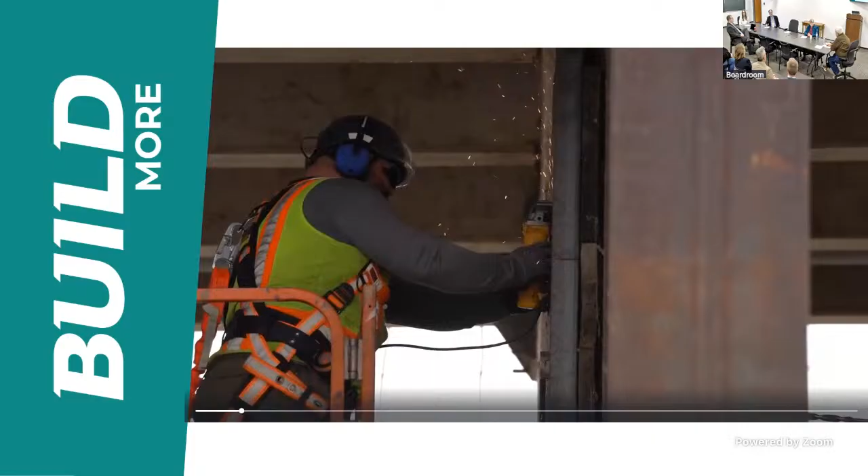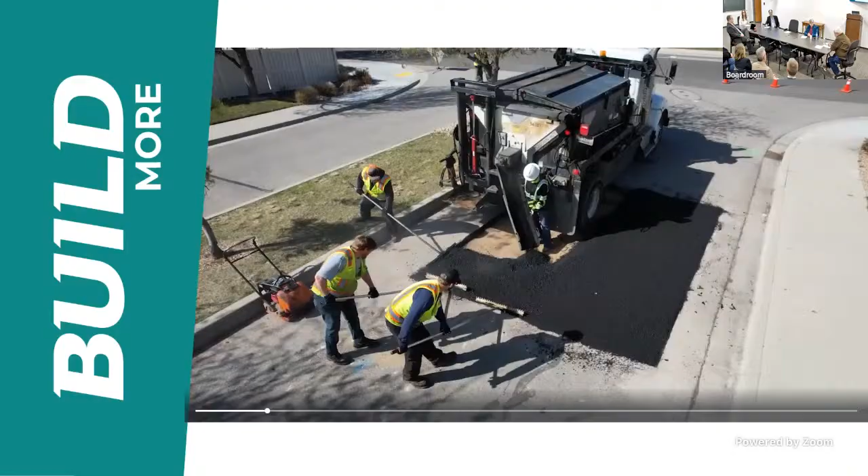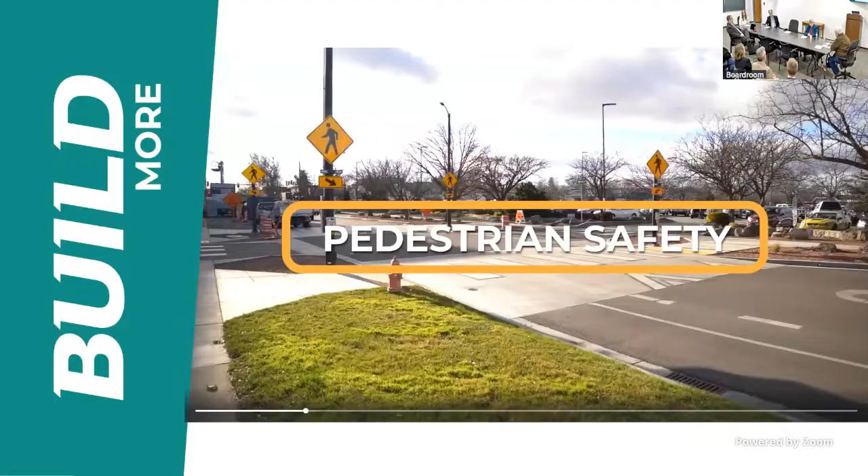ACHD advanced critical transportation projects that will serve Ada County for years to come. 13 project designs were completed, setting the stage for future construction and long-term improvements. Notable construction projects included Eagle and State Street, State and Pierce Park, Eagle Lake Hazel to Amity, Ustick Black Cat to 10 Mile, the award-winning Eckert Bridge repair, Phase 1 of Linder and Overland, multiple pavement preservation projects, pedestrian safety improvements including RRFBs and PHBs, and 18 drainage projects. Together, these investments added connectivity, resilience, and safety across the network.

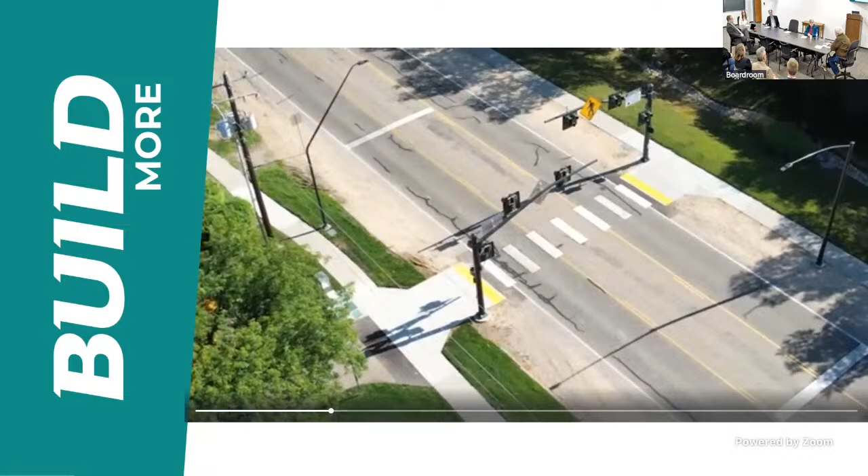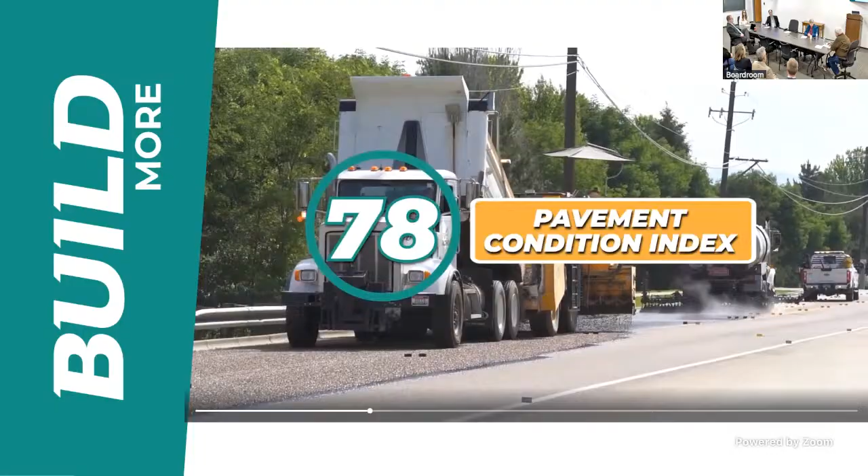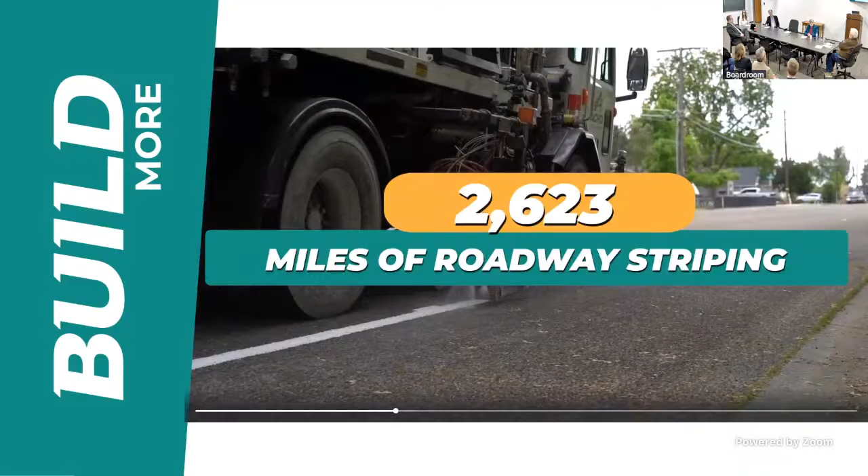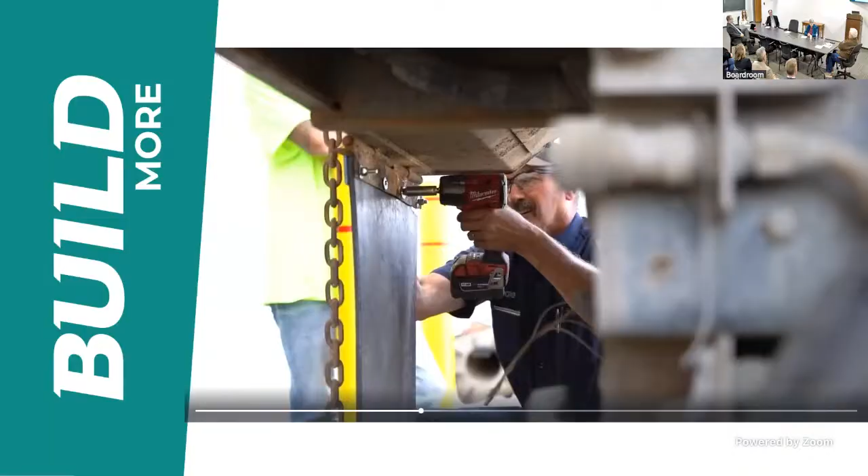Keeping our road system running smoothly remained a top priority. Operations crews chip-sealed over 300 lane miles, helping raise ACHD's pavement condition index to 78, outperforming many agencies across the Northwest. Crews filled a record-breaking over 13,000 potholes, painted or refreshed more than 2,600 miles of roadway striping, and installed over 7,000 new signs to support clear and confident travel. Through coordinated maintenance, efficient fleet management, and integrated deployment, ACHD's operations save taxpayers up to $25 million annually.

To support this work, ACHD added 15 new vehicles to the fleet, helping crews cover more ground and get more done every day. ACHD completed construction of a state-of-the-art traffic operations center, supporting real-time monitoring and smarter roadway management.

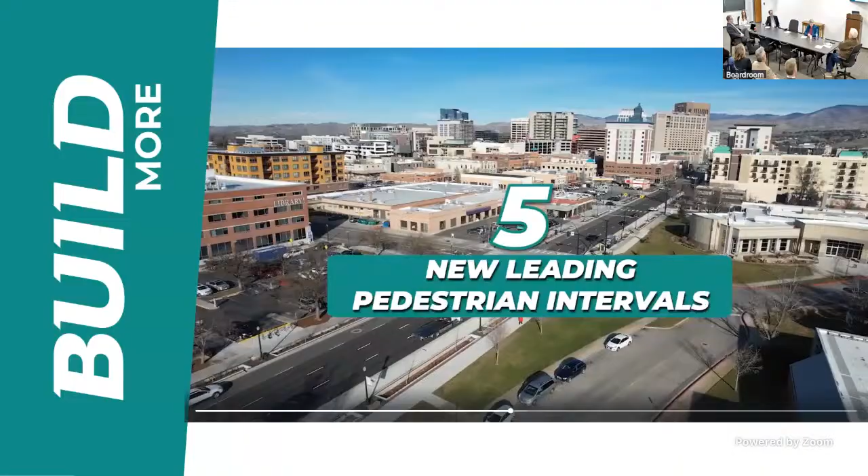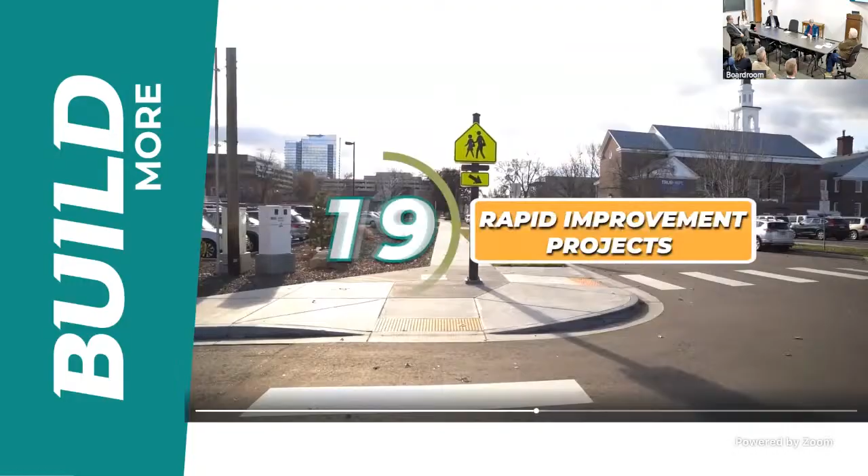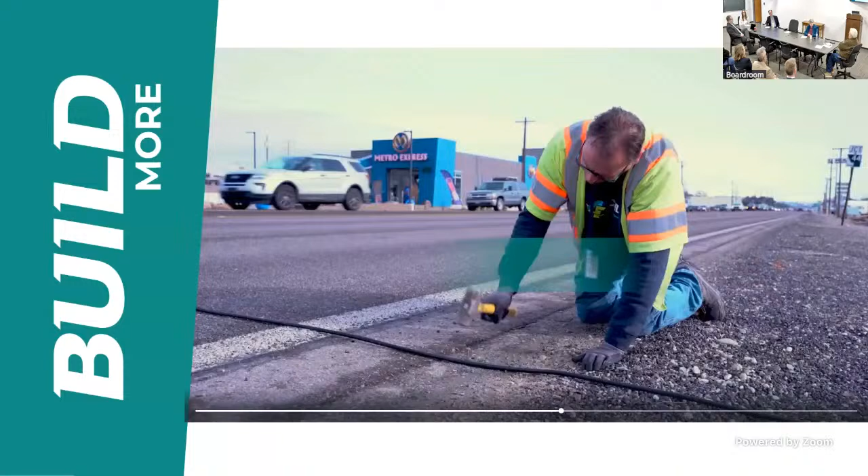Safety improvements continued countywide. We deployed 135 new traffic signal controllers, installed 5 new leading pedestrian intervals, bringing the countywide total to 66, and completed traffic calming on 11 neighborhood streets. Our safety engineering team delivered 19 rapid improvement projects, improving intersections, school routes, and community roadways. Decisions were guided by data collected from more than 1,000 traffic count and study locations.

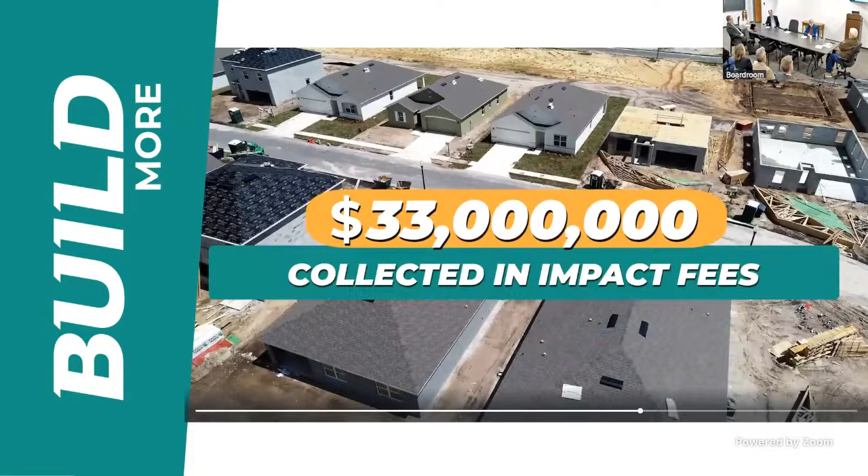Growth in Ada County continued at a strong pace. ACHD processed 648 development applications, with an average review time of just 23 days. Nearly 1,000 construction plans were reviewed, 586 were approved, and almost 4,000 permits were issued to support construction and special events. We also collected nearly $33 million in impact fees, helping growth pay for growth. ACHD once again passed all financial audits.

This year also included the transition into our renovated Meeker headquarters, supporting day-to-day operations across ACHD. ACHD strengthened operations through transparency and accountability, responding to 427 public record requests. Subject matter experts engaged with local media 62 times, contributing to more than 200 stories that kept the public informed. We also launched ACHD Connect, a new customer service portal that makes it easier for residents to get updates, report issues, and receive answers.

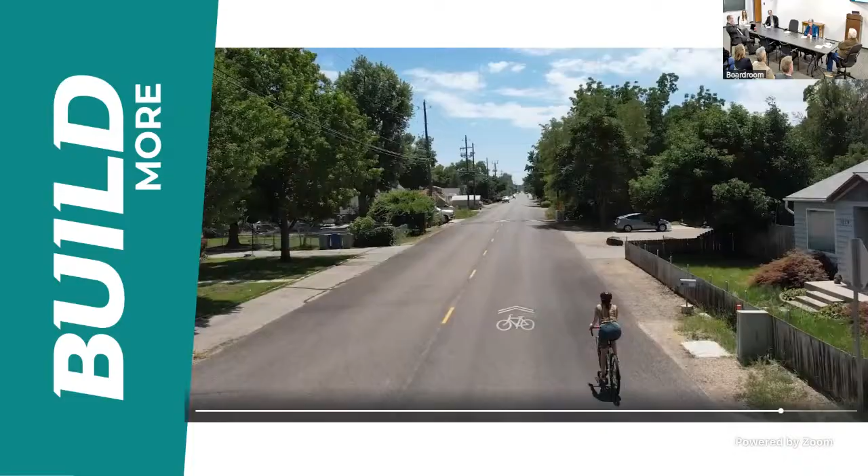ACHD helped remove over 3 million miles and more than 1 million vehicle trips from Ada County roads through van pooling and smart commuting. We are proud to earn designation as a Gold Bicycle-Friendly Community, recognizing major progress in making Ada County a better place to bike. ACHD also continued outreach through safety campaigns focused on visibility, distracted driving, and stopping on red, reinforcing shared responsibility on our roadways. Together, these efforts reflect ACHD's commitment to delivering results today while preparing Ada County for the future.

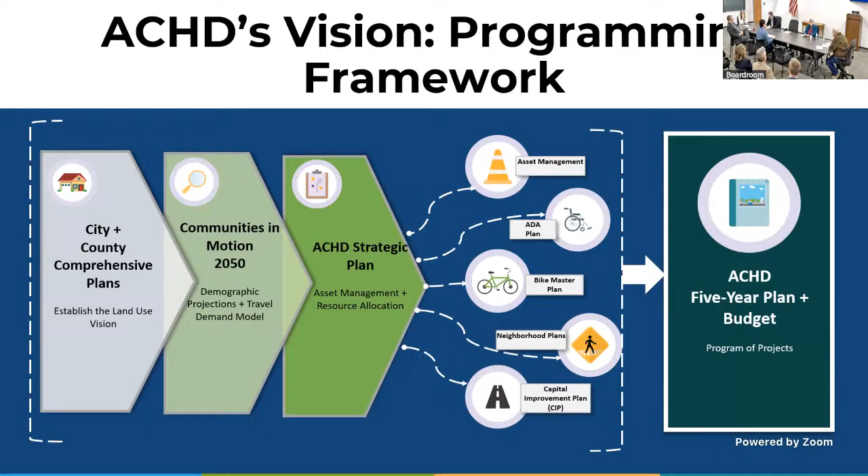Staff wants to highlight the early programming objectives identified for this year's update. Starting with the first 2 years, 2027-2028, we will continue to develop those years with a balanced budget and in coordination with the FY27-28 budget. Consistent with last year, we'll continue to work closely with our partner agencies to focus on their top ranked projects, and as these projects move towards construction, accelerate the projects following their priority list.

A theme we want to highlight this year is ACHD's continual effort to fully fund our asset management program, including the capital maintenance program, the bridge program, and ADA related programs such as Safe Sidewalk and Ramp. One key aspect to stay informed of is the sunsetting of the vehicle registration fee in 2028. At this moment, we'll continue to assume that the program will continue to move forward beyond 2028.

This year, we'll also update our capital investment program with the recently adopted 2025 Impact Fee and Capital Improvement Plan. As part of this update, we're planning to come back in front of the commission to provide an update regarding its implementation and our strategy to implement impact fees into the later years of the plan. We also want to give commissioners an opportunity to voice any areas of concern, or additional areas you'd like staff to focus on this year through this update.

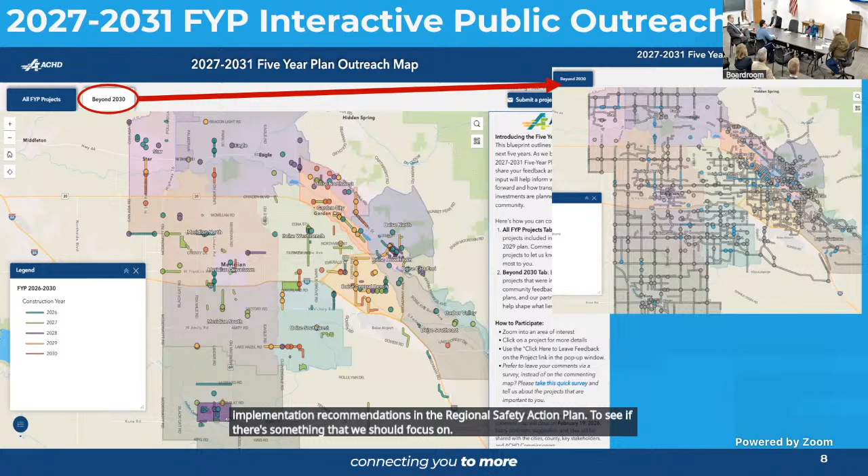Second, I'd also like to look at the implementation recommendations in the Regional Safety Action Plan to see if there's something we should focus on. I know there were specific recommendations to ACHD, but I'd like to see how that translates to the 5-year plan.

That's all. Madam President, and maybe recognizing that, I really think a balance here could be that these are tools we make sure we reference and share with our partner agencies, who have more technical staff looking at that and creating their prioritization.

I do think that the goal of this map is to crowdsource data in terms of people's experience, but I do think that having the tools all in one place where people could access them is reasonable. We'll make sure, as we set up the one-on-one meetings with each of the partner agencies, to share all those resources the commission has mentioned.

One other thing that might be helpful is we work with different neighborhood groups and always try to channel them to their partner agency. So it might be helpful to know when the partner agencies are going to drop their priority list. Typically the governing board approves that list, so knowing when that would be helpful.

I'm not sure. It's like when people have their budget adoptions, the assessor lets everybody know when those dates are. But when we do know that, it would be helpful to somehow communicate that. Do we have a deadline for neighborhood associations to weigh in? Is it the same as the public or the partner agency one?

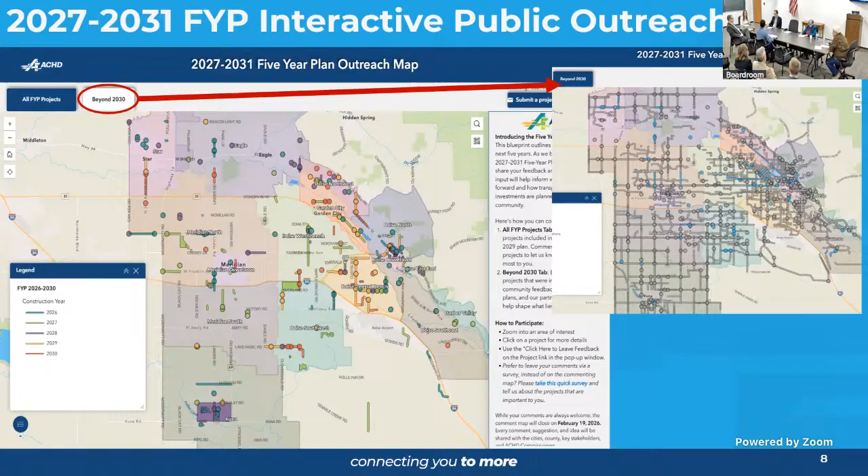Is that all for you? No. Okay, got it. Sorry, I'm so sorry. One more slide.

So in your packet we included key dates and milestones for the commission to see what the timeline looks like. We're, like I mentioned, working with our partners on those one-on-one meetings.

In coordination with the budget, that's something we closely work with them on as we get into the initial draft of the plan, which takes place in July and August. For this year we're aiming to bring a draft of this year's update to the public on September 9th, with an adoption consideration for the commission by September 23rd. Those are the dates we're certainly aiming for. As time goes on the schedule can be refined, but that's what our goals are at this moment in time.

And with that, Commission, I'll conclude my presentation and stand for any questions.

Thanks, Edmondson. Any other questions for Edmondson? Commissioner Nelson? No. Okay, I appreciate the work, it's never ending. Thanks so much. Thank you, Edmondson.

All right, next up we've got our second work session, fiber deployment and ACHD right-of-way, presentation by Justin.

Madam President, members of the commission, for the record, Justin Lucas, Chief of Operations and Infrastructure here at the Highway District. Today I'll talk about fiber deployment and ACHD's right-of-way. It's kind of a hot topic right now, and has been for several years, as we've seen different providers come into the valley seeking to expand access to fiber telecommunications and internet to the home. I think it's fair to say that the Treasure Valley, specifically Ada County, is unique and somewhat limited in access to fiber broadband. I know we've heard that from our partners, and that reality plays into this discussion somewhat.

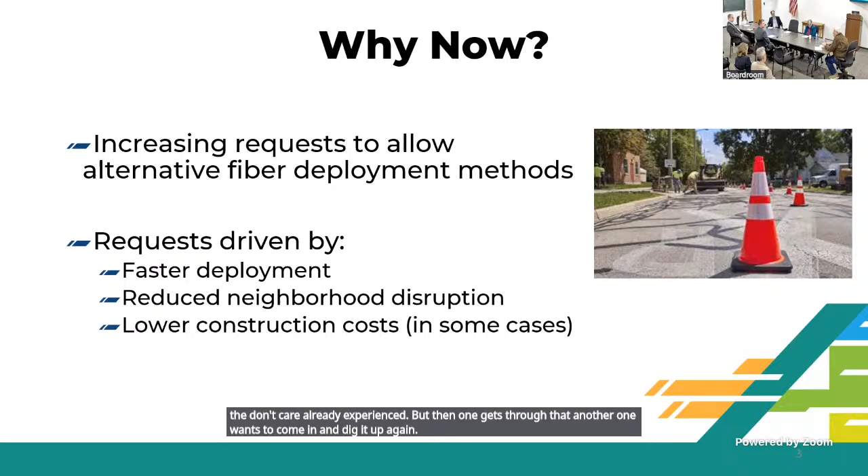Everybody wants to go in and they might want to do it fast. They might not care—we've had the 'don't care' already experienced. But then one gets through, then another one wants to come in and dig it up again, and then another one wants to come in, dig it up again, or put the fiber wherever. They all seem to want to compete for the same neighborhoods, and yet there's an incredibly huge percentage of the county that's completely ignored. I'd be really happy if when somebody wanted to come into one particular area, it was opened up to everyone, and if they didn't want to participate, then maybe they got to wait another 5 years or something. Because it's just one request after another, one disruption of the right of way after another. It just doesn't work out well for the Ada County taxpayers.

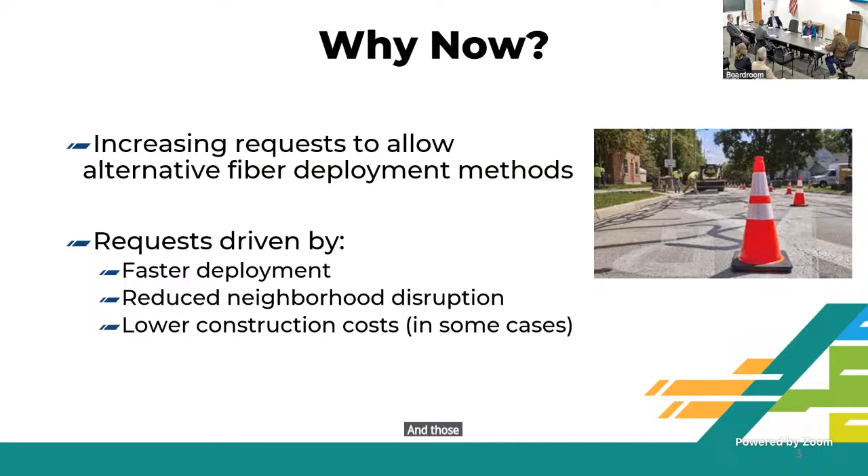Madam President, Commissioner Goldthorpe, I think that's one of the concerns staff has, and it's why we're having this work session today—to walk through some of those issues, listen to that feedback from the commission, and if and when we move forward with alternative deployment methods, make sure we have standards and procedures that help avoid all of that if we can. But it's difficult, and that's why I want to be transparent today. These are difficult issues, and when you open up the aperture and allow one provider, another provider makes a claim of fairness—if you're allowing them to do this, I should be able to do this too. Those are the kinds of conversations we found ourselves in as we worked through this, and I'll get into it a little more today.

Just wanted to establish ACHD's role. I don't need to go all through this with the commissioners, but really, we need to protect the right of way and protect the public's investment. We're a unique agency in how we were created, in our jurisdiction, and our focus on transportation and the right of way. When these types of requests run through different jurisdictions—more general purpose jurisdictions like cities—I think the policy considerations may be a little different than how we look at it at ACHD, but that's the reality of who we are as staff. And it's hard for us—we don't want to get out in front of the commission on the wisdom or the benefit of overall broadband to the community.

That's more of a broad policy consideration. We want to stay focused on the right-of-way and the impacts on the right-of-way, not only in the short term, but the long term. And that's part of this conversation.

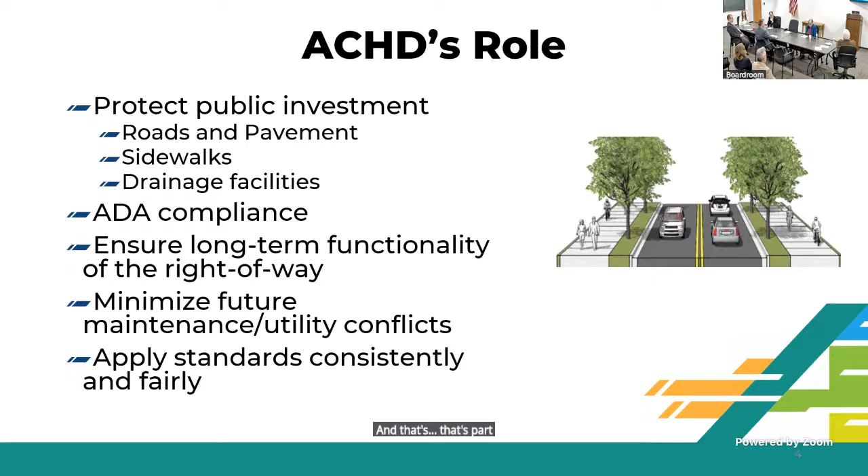So just to level set on where we are today, we have a specific section related to fiber telecommunications infrastructure, section 6,000 of our policy. It goes into depth on what's required for all these different providers. Right now, there is a lot of fiber being installed in Ada County under our current policy. Hundreds, thousands of miles most likely have been installed over the past 5 to 10 years within Ada County, so it's not like there's no activity on fiber installation.

It's happening. Right now, within the right-of-way, we require a minimum depth of 30 inches. This is essentially an industry standard that has been in place for many years across the United States. The reason for that, it's a proven approach. It lowers the long-term risk to pavement and sidewalks, with minimal conflicts with future maintenance activities. The shallower you go, the more likelihood of needing to remove or relocate those facilities with some future maintenance activity or other utility installation.

This approach has let us establish pretty consistent inspection and enforcement standards. We have established corridors for different utilities, which is somewhat unique for our county. For fiber specifically, we've established the south side of the road and the west side of the road as the established corridors. When utilities want to go outside those corridors, we require by policy that they coordinate with the other utility companies that have those corridors and get written approval for a parallel run within another utility's corridor. We think that's really worked. It encourages coordination and cooperation between the utility companies, and in general we get good feedback because it's consistent and fair and people know where they're supposed to be.

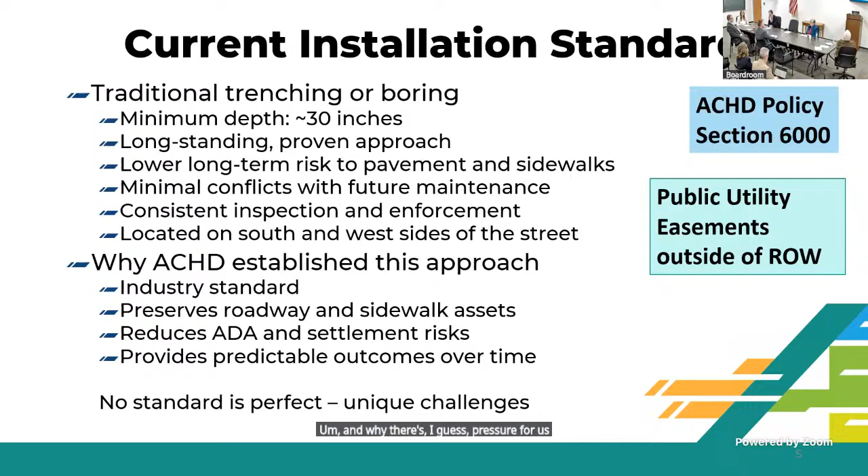So I want to hit on these, and I think it's important to highlight this because I don't want this to be a one-sided story. There are benefits to this. Whether those benefits are more geared towards the company and maybe the citizen in the short term versus the long term, I think is where staff is trying to balance this and find the right spot. It's challenging sometimes because it's hard to know. Some of these methods aren't necessarily tested for the long term. They don't have a huge track record. Some have a longer track record than others, but there's not a lot of data related to some of these requests on the national level.

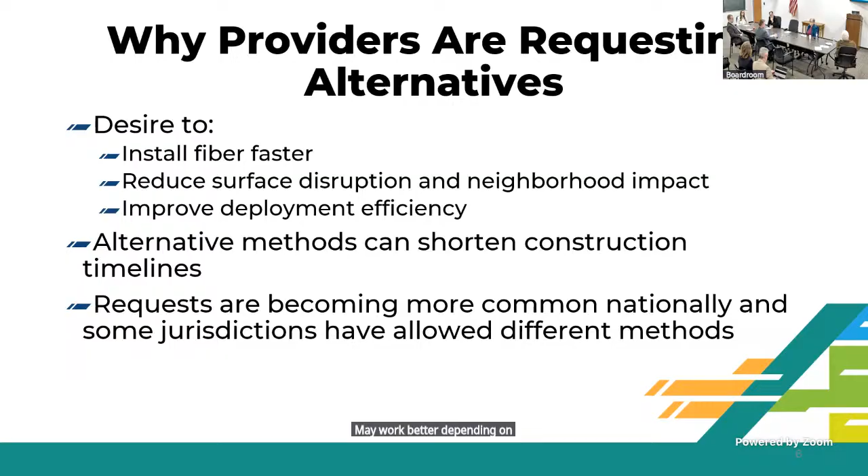Also, ACHD has unique pavements. We are aggressive chip sealers in this community. So some of the methods, depending on the roadway itself and the history of maintenance on that roadway, may work better depending on the road. That's all part of this nuanced conversation.

So I wanted to highlight three today. These are the active conversations we're in on the different deployment methods we're receiving active requests on. I'm not going to use specific company names today. You may have heard things, but for the purposes of this presentation, I'm trying to avoid that. I'm not trying to point fingers or play favorites. This is just about installation methods, and these methods could be used by different companies. Some of them may have some proprietary aspect, and I'm not going to get into all that today, but this is the three I wanted to focus on.

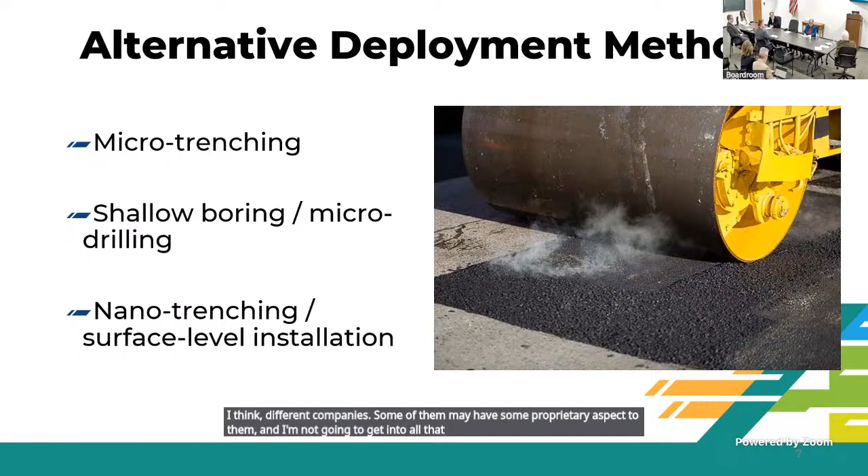Micro trenching, for those who haven't seen presentations on that, it's essentially a narrow saw cut in the pavement. We would still consider it a trench, just an extremely narrow one, cut with a blade that cuts through the pavement and into those base layers. Then a conduit and fiber is installed within that conduit, approximately 12 inches below the surface. There are different ways to do it and different depths, but for today's purposes, it's about a foot below the surface.

There's different ways to do this. These cuts can happen at the edge of pavement, which is probably the largest request for Ada County right now, but they could really occur anywhere within the pavement—let's say the first 3 feet from the lip of gutter. You could have a micro trench request to install the fiber. It's pretty fast; they can lay a lot of fiber using this methodology. One of the things with these types of methods is it really reduces the spoils—when you're removing less material, you don't have to replace or dispose of as much. So micro trenching allows you to move faster because you're not going as deep, and you can lay that conduit in pretty quickly.

The fill material they use is essentially like a flowable concrete. It goes in pretty liquidy, backfills the micro trench, hardens over a period of time, and in some instances is then covered by mastic—a specialized crack seal material. So what you're left with is the trench backfilled with a cementitious material and covered with a crack seal material. I think the long runs right at the lip of gutter are pretty straightforward, but when you start to encounter obstacles or have to deviate, it gets a little more complicated on the restoration requirements.

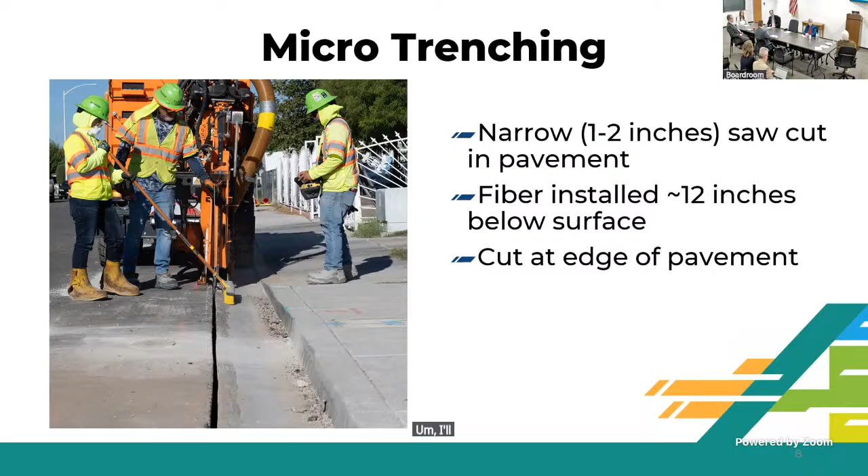Shallow boring, micro drilling, this is essentially similar to the methods being used today, but the boring depth itself is just less. The equipment oftentimes can be smaller and a little bit faster depending on the depth you're at. We've seen requests so far with boring depths anywhere between 8 and 24 inches. Some of the boring depth question becomes interesting: do we allow different boring depths behind the sidewalk and that softscape and the 2-foot utility easement versus underneath the roadway?

I think staff is pretty sensitive about the roadway cross-section itself. When you bore directly into base material, there's some concern about reflection of that bore upwards or potentially dislocating material and having future issues. And we have seen that. Even at depths of 30 inches, we have seen it reflect all the way up and create issues in the pavement layer 30 inches above. So I think our concerns there are based on just the reality of boring and how it works. But these are the requests that we're seeing, and I think some of the justification behind that.

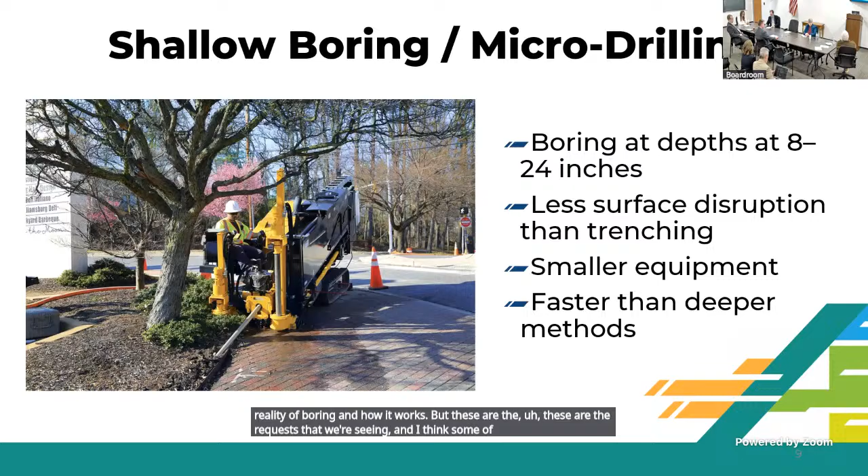Nano trenching or surface level installation - you heard from Crown Castle just before my presentation on this type of installation. This is essentially a very small channel directly within the pavement, and there's no conduit typically installed; the fiber itself is directly laid into the roadway. There's different methods that have been used historically to backfill. There was a tape product that was used. The current request we're looking at is a gasket material - a rubberized gasket material that is embedded above the fiber to hold it down, and it essentially creates a seal. This is extremely fast installation.

Once again, I think the devil's in the details sometimes about what do you do with it? How do you get it across the sidewalk? What do you do in non-standard situations where you just don't have a straight line? This is probably not best installed right at the edge of the pavement - it probably needs to be out within the pavement itself, because you want a clean cut so that gasket is embedded in there correctly and will hold. But very fast when it comes to installation.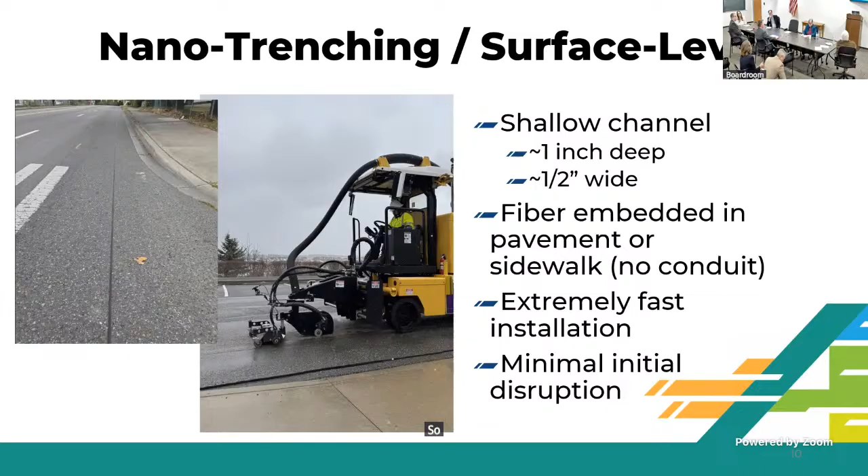And it's hard. I wish I could say we had the perfect answer - we really don't. We have a method, a policy that allows fiber installation in a certain way. We do not have to change our policy or allow these other alternative methods. Really, it's up to the commission to decide if this is something you want us to consider at the staff level. We've done our best to learn as much as we can about all these different methods.

I think it's fair to say there's some pros and cons. But one of the realities we've seen with other companies as they've come into market is we've seen and heard a lot of great intentions, but the contractors or subcontractors they select oftentimes aren't necessarily able to live up to the quality standards that even the company might desire. When you get this many contractors laying this amount of fiber, we have seen quality issues when it comes to that. And it's a concern, and I know it's a concern of the commission because we've received a lot of public feedback about previous failures in this area. So that's kind of what we're working through.

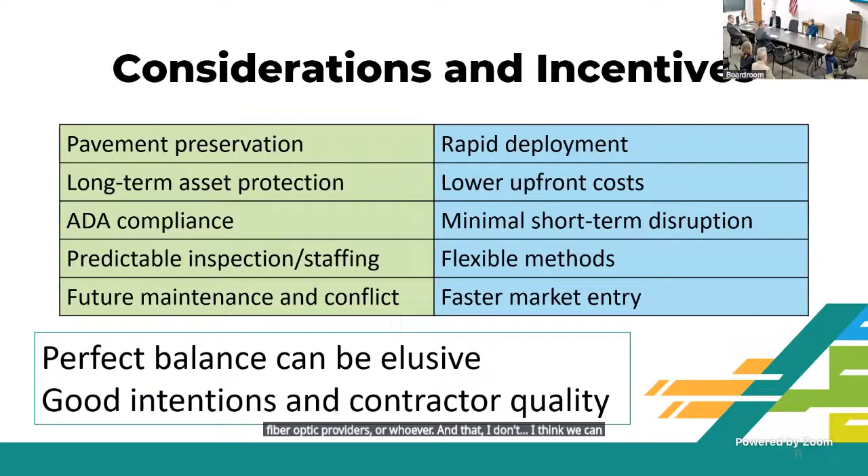So commissioners, we're walking through this. I think what I'm hearing today is not necessarily and absolutely not - it's that you want more information, totally fair. And a cautious phase consideration of alternative methods is what staff would, at the commission's direction, like to walk through with you.

It takes time, and I know there's pressure from the companies to move quickly since they want to get their fiscal year plan set and all that. I can't commit to any specific time frame. I can commit that we're spending time on this as staff. We'll continue to bring this forward. We're going to try and establish a process to walk through this. But we want to be somewhat cautious before we jump right in and allow a broad deployment of a new method without having all of our ducks in a row.